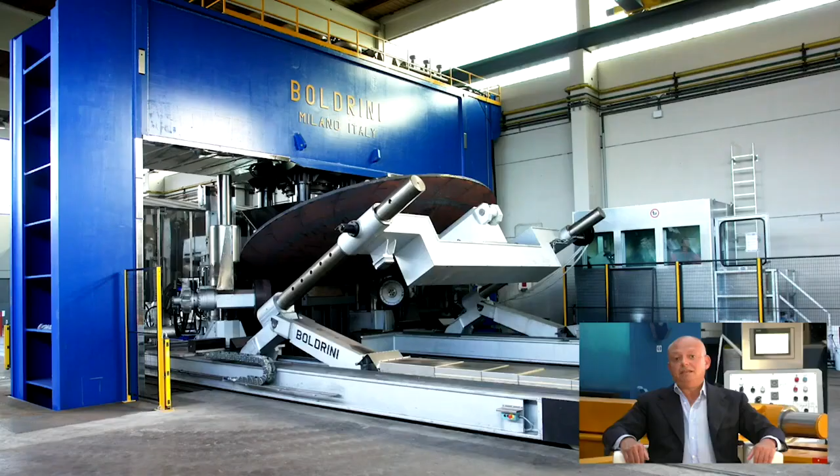I have been working for a great part of my work life in industrial machinery for metal forming. I have followed the commercial and technical development of some of the most important equipment in the market. Just to give you some examples: dishing press, 1,000-ton force, 10-meter span between the columns with automatic manipulator and CN. Dishing press, 1,200 tons with automatic manipulator CN capable of working in hot and cold condition.

Flanging machine capable of flanging up to 80 millimeter thickness material, 516 grade 70, and maximal knuckle radius of 1,000 millimeter. Rotex hot spinning machine. It's a unique piece of equipment capable of doing hemispheres and heads starting from a flat blank 7,200 millimeters and plate thickness 220. And also plate roll with variable distance, so the pitch of the bottom roll, 3-roll type, 6,750 tons.

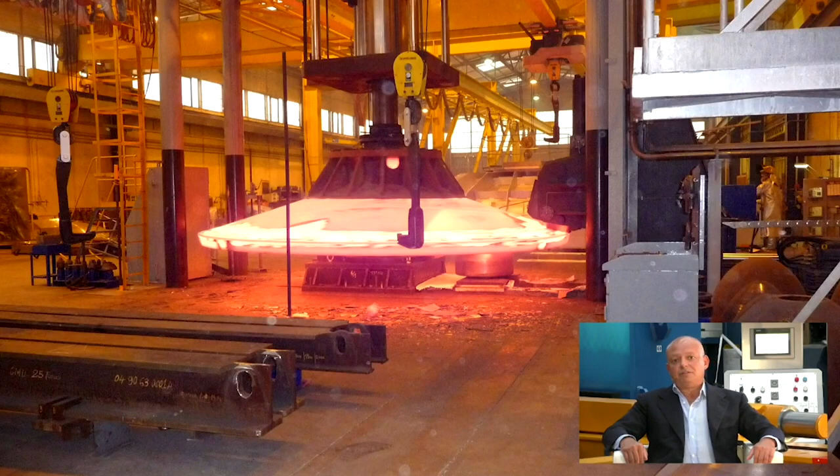I think that there is always room for innovation and sustainability. Faccin Group embodies this spirit by offering to the market 3 leading brands like Faccin, Boldrini, and Roundo. Our challenge today is to achieve the highest level of efficiency in any kind of machinery that we produce. Well, I can definitely say that we are in very good hands. But before we move to the main subject of this webinar, Rino, I wanted to ask you something. We have seen a huge interest in this webinar and many registered people from all over the world. Why do you think this is?

Well, Javier, let me start by saying that most manufacturers of pressure vessels, truck tanks, silos, and other kinds of tanks and pressure vessels purchase the dish heads and then they weld the component to their roll part. Let me tell you that the demand is huge and dish head manufacturers are getting overwhelmed. With the pandemic, the deliveries, particularly internationally, have been disrupted. And there is now a new line of thinking about manufacturing locally, and I do believe this is driving interest to this webinar.

Perfect. So we will focus on this concept and more during our webinar and explain in detail what we are doing to achieve efficiency in our machines. In the meantime, let me show our viewers our group's manufacturing capabilities. Certainly, Javier. Let's start from the real facts of our capabilities and our facilities.

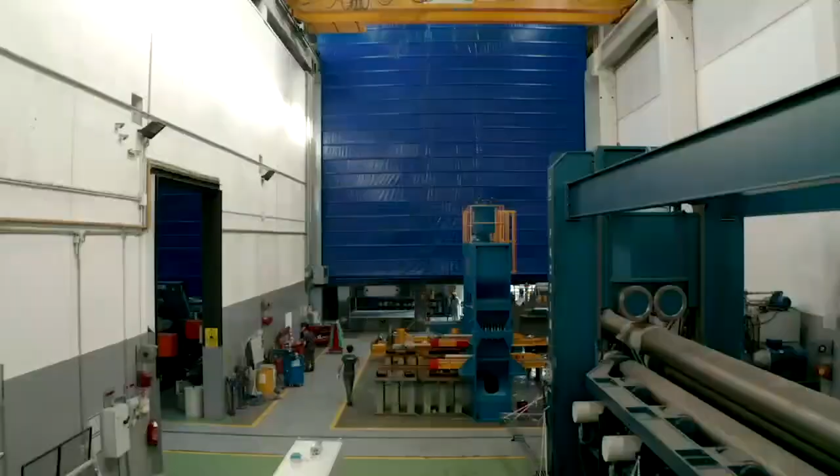Wow. During these days, we have been discussing all over the world the impact of COVID-19 on the world economies and on industrial production after the restrictions applied to contain the pandemic. So, Rino, what do you think about the vertical production structure? Javier, this is a real big thing.

During the last decades, many industries have organized their supplies by outsourcing from the market. It has been understood very clearly now, when the market collapsed and many companies could not follow their production schedules and supply chains were not performing, that outsourcing can be risky in such a market condition. As you have seen in the company video, at Faccin we have a vertical integration. We start with plate profiling, fabricating, machining, and we can do internally turning, milling, boring, and polishing.

We found out that having this in-house has been the greatest support for our resilience. Furthermore, we have full control of quality inspection, pre-shipment commissioning, testing, and crating for shipment. It was a wise decision to keep vital and critical production stages inside Faccin. This allowed us to keep working and also to acquire new orders, as we can have better control on the delivery and generally on scheduling.

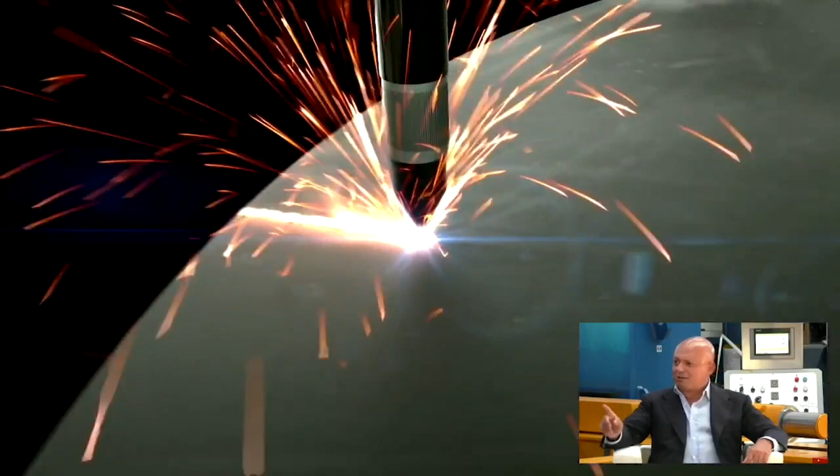I hope that you studied last night about the dishing and flanging process. Javier, you can bet I can even tell you the difference between a press and a flanging machine. Well, I think that one fits rolls and the other fits dies, but I'm not sure which one.

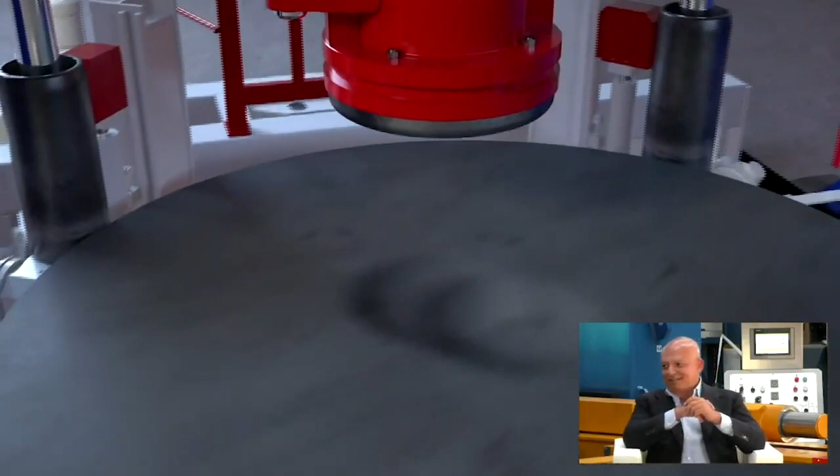Of course. Well, Javier, apart from joking, I think that I'm a DNA engineer for heads production, and my experience is fully available to the Faccin organization and its customers. Rino, we are now ready for the first main question. If I were a client, what should I know before investing in a new dish head line? At first, Javier, there is no common rule, as the best for one client is not the best for all clients.

Rino, I think that we both agree on your assessment. Tell us how to get the best solution for a specific customer. As a first step, it is very important to make the preliminary approach to the customer's needs. The pre-feasibility is the most important stage for the proper definition of the correct machine. Let's ask Andrea Comparin, Senior Sales Manager of Faccin Commercial Department. Sure. Hi, Andrea. Can you introduce yourself and then explain to us what is generally the client's preliminary approach?

Hi, this is Andrea Comparin. I've been working at Faccin since 2011, and I had the opportunity of traveling throughout the world for the company, but I follow mostly Northern Europe and some Mediterranean countries. I also joined the sales team for relevant projects all over the world, from Australia to South Africa, Middle East and Far East. Generally, we deal differently with inquiries coming from new clients planning to start a new production line, and from clients already experienced with presses and flanging machines.

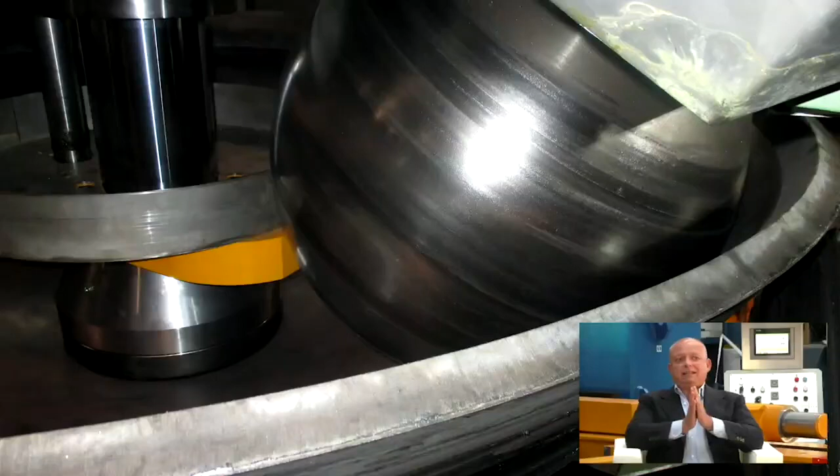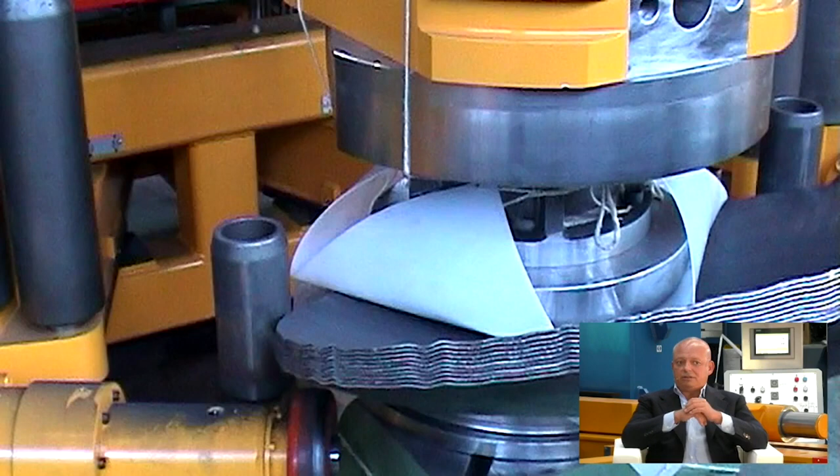Back to you, Rino. So how do I get a fast payback on my dish head line investment? Rino, at the end, I think this is, I guess, the most relevant key driver. Javier, you're asking something very important. Many times we see proposals from our clients. At first sight, they just look like a list of brands and components used to manufacture the machine. We are a machine manufacturer, and we care, of course, about components, but our target is not reselling pumps, bearings, valves, or electric motors.

What we have to sell is the performance, and we have to guarantee the performance of our machinery. Our machine has to be a profit-making unit for our clients. And again, a profit-making unit. Rino, let's make it simple then for our viewers. How do we get to a sustainable investment for our customer? We start from the performances of the machine and the production output.

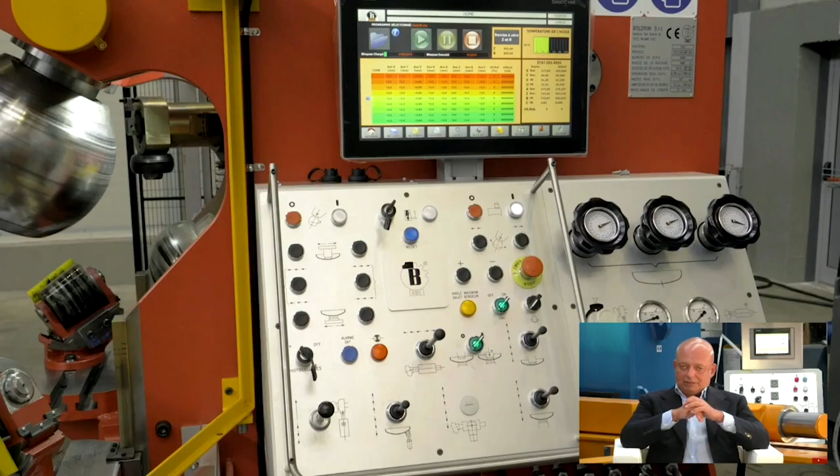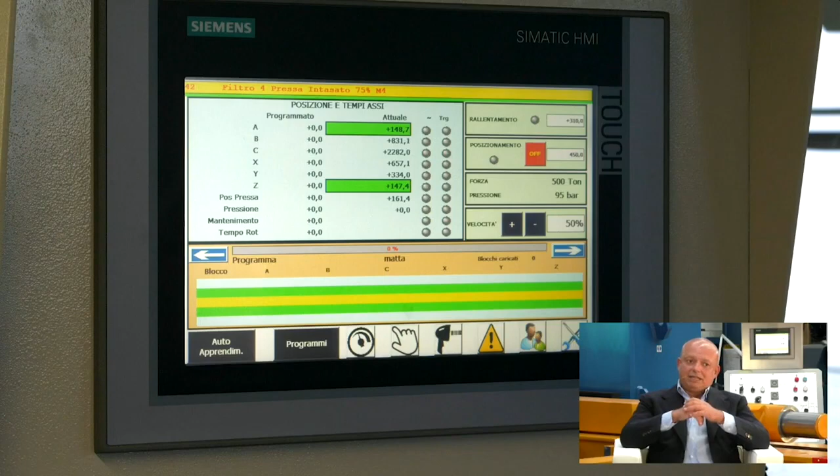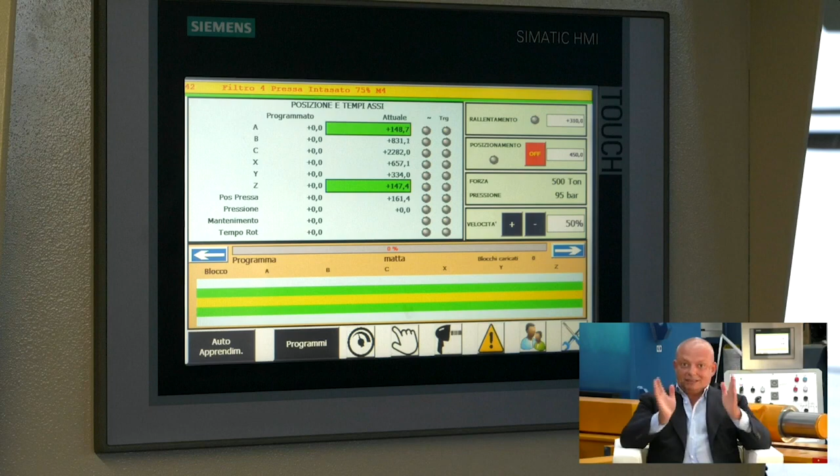We are investing in new software to increase the data output of the machine in a way that our clients will have the machine linked to their network, and they will have the possibility of checking from the back office how many hours the machine was active, how many hours the machine was running in production, the total daily production. In some cases, it will be possible to upload production cycles directly from the office to the machine, and also our target is to check the final production cost of dishing and flanging, including the energy cost applied for each stage.

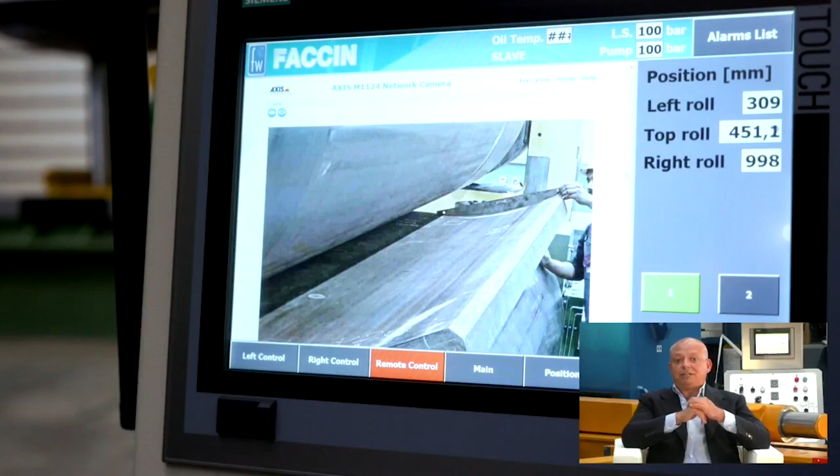And also, we have to be predictive for the maintenance of the machine. It will be a modern and updated way to have a better footprint in the production plant of our clients, and to reduce carbon emissions and protect the environment. It sounds very interesting, Rino. Could you please explain what else we could offer to our customers?

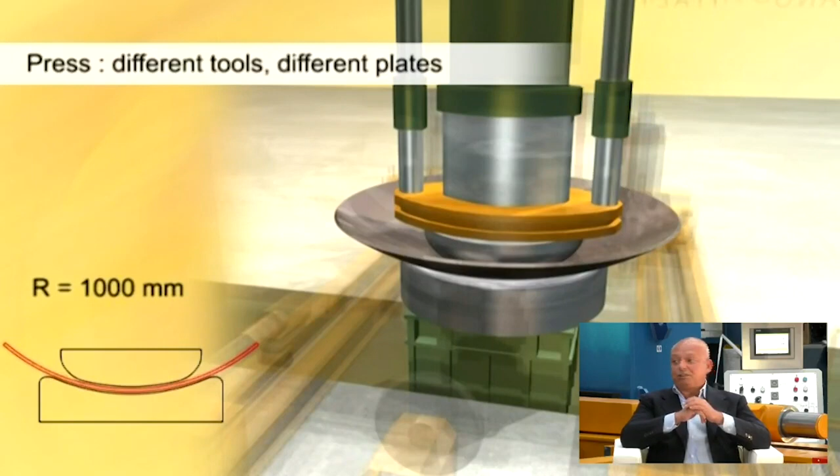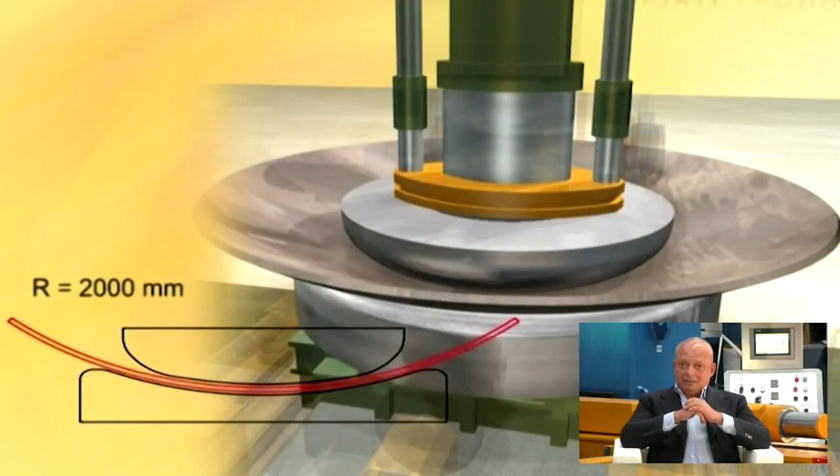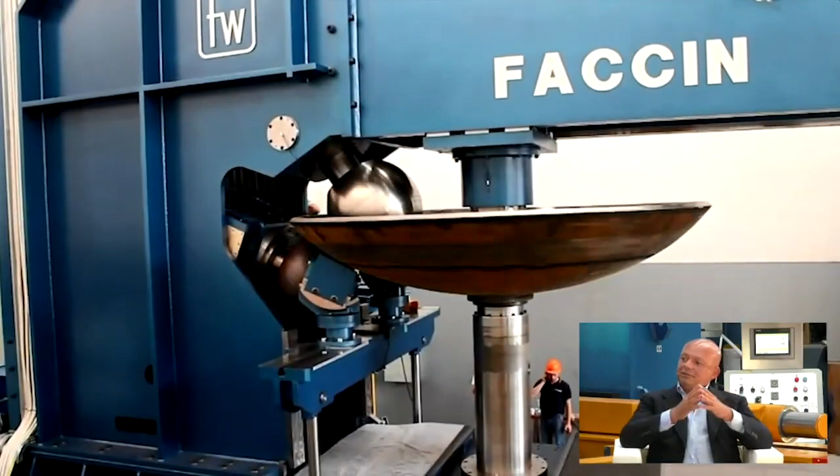Javier, we are very flexible to adapt to our clients' needs, and for many decades, we have manufactured many different types of press dies for specific needs. The right press tooling might reduce the production time up to 30-40% in the total dishing time, and also it can reduce the thinning. A typical example is when we press aluminum plate. Some diameters and radii require changing 3 to 4 dies, and the time to change the dies is much less than the total time if we were not doing this process. So at the end, we save time.

Using the right tools, we also significantly reduce the thinning. And you said, why that? Because we don't overwork the material. And saving the material is the first target for a client. And also, we may save intermediate heating processes, because if we can control the thinning, we don't need to add extra expensive heat treatment. I think that Marco Massensini could tell us more about his experience.

So Marco, can you tell us about yourself and your experience in the support process to your clients? Hi Javier, I'm very dedicated to the support of our clients, and I recently had a few cases that we studied and carried out successfully. I joined the Faccin family 4 years ago, and I come with a process engineering degree. I've had a great chance to grow my capabilities following very interesting tasks.

One client with a market activity of 25 years producing equipment for the pharmaceutical and food and beverage industries had developed its own equipment. I analyzed their production steps with them, and finally we came out with new machinery and new processes. The final result was a significant production cost reduction, and our client was very satisfied since they obtained a higher added value product to be offered in the market at a better price.

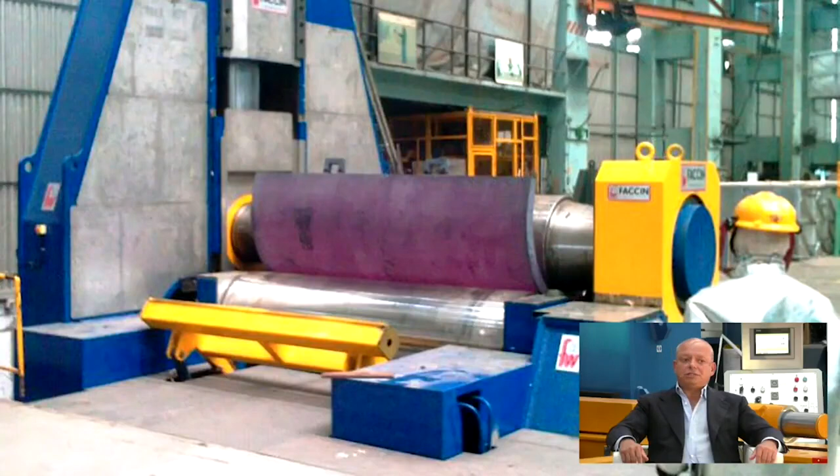We have materials that can be formed in both cold and hot condition, and we choose hot forming many times to increase the forming capability for higher thicknesses. In pressing, we may also choose the hot process to reduce thinning and to cut the manufacturing process time.

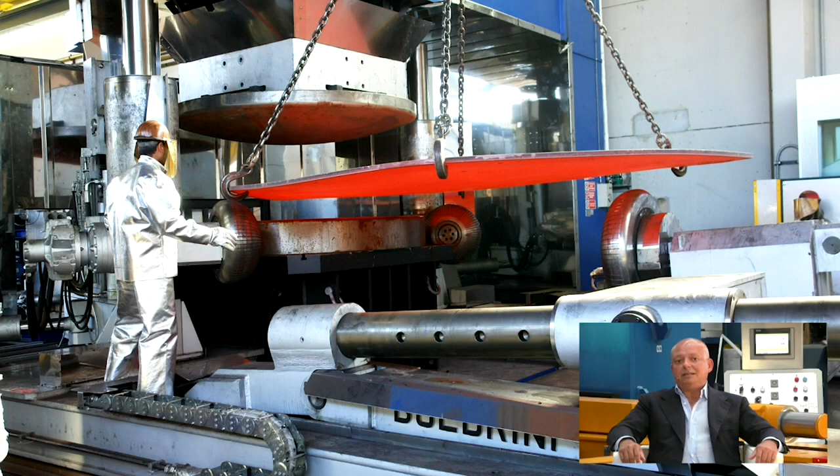We have a very successful experience with the dishing press and manipulator to press plates up to 160 millimeters in hot condition. In other cases, the heat delivered to the plate is necessary to avoid damages on the material, for example aluminum, where we have to heat the plate up to 250, 270 degrees to avoid any cracks. In other cases, titanium - if you don't heat titanium up to 500 C, there are no chances to form it without damaging the material dramatically.

Hi, this is Diego Morbini. I've been working at Faccin since 2005, and I visited many countries during my time at the company. But I now follow mostly the Chinese market, Far East, and Oceanian countries. I also support the sales team in relevant projects, from the technical evaluation of special equipment to tailor-made solutions for different fields of application.

It's very important to start with a proper definition of our clients' needs, as this is the key to the right proposal. I've got experience in selling forming lines to customers that manufacture pressure vessels and also cryogenic tanks. In Vietnam, for example, we were successful twice with a client that produces heads for the global market.

So Diego, in your opinion, what is the key factor of your marketing strategy? I think that our clients do consider the support we offer, from the proposal to the after sales. We build up confidence based on the long experience of the group in design and manufacture of head forming lines.

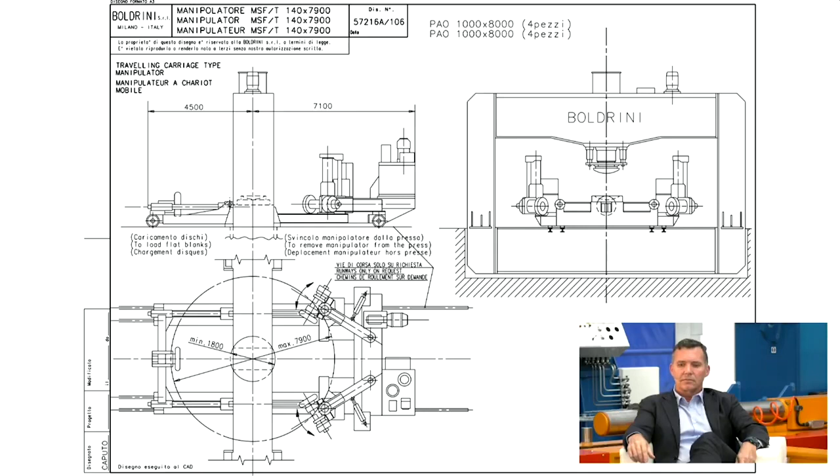Rino, I would like to show some pictures. Would you like to comment? Surely, please. Well, you can see in this picture a layout drawing of a typical dishing press with manipulator. And this is specifically a machine with a pretty big daylight of 8 meters and 1,000-ton force.

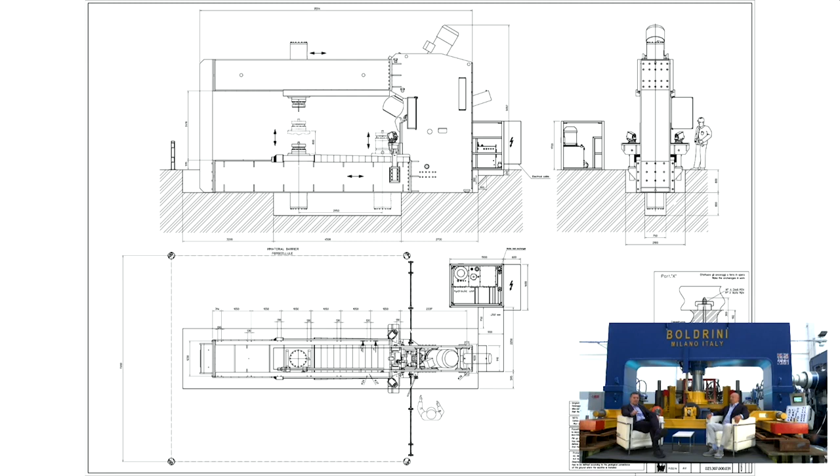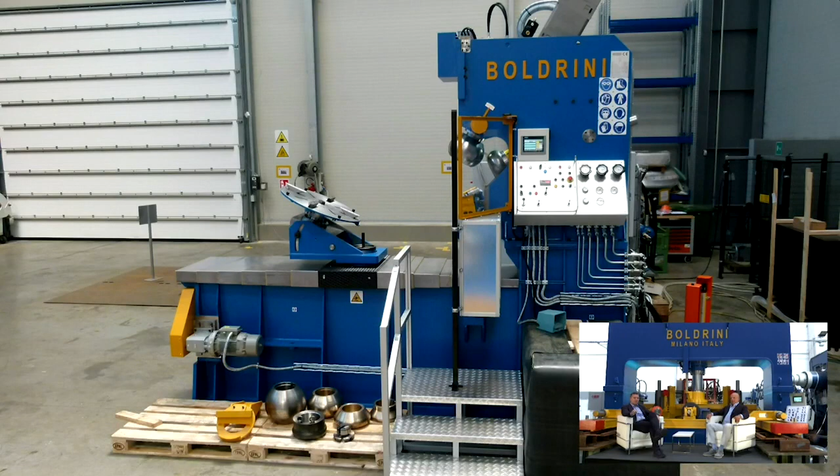And this small flanging machine, it's small but powerful because it has interesting features. It can work without the upper beam. It is very fast, very versatile, especially to make a conical shape, tilted and with vertical axis of the cone.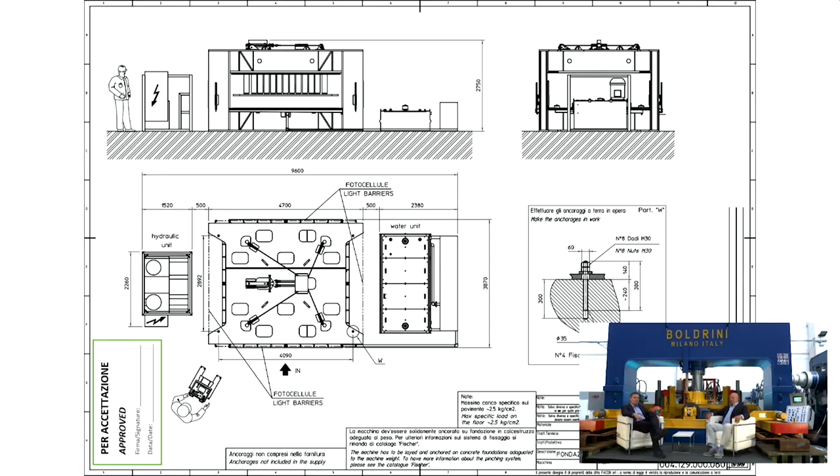You can see in this picture we have the layout of a very special press. It's a hydroforming press designed to make oval, elliptical, and multi-center heads. In the next slide you can see the specific part produced. Being formed with hydroforming, the stresses are very even, and there is no part of the material that is overworked, and there are no damages on the surface. It's also a very fast process.

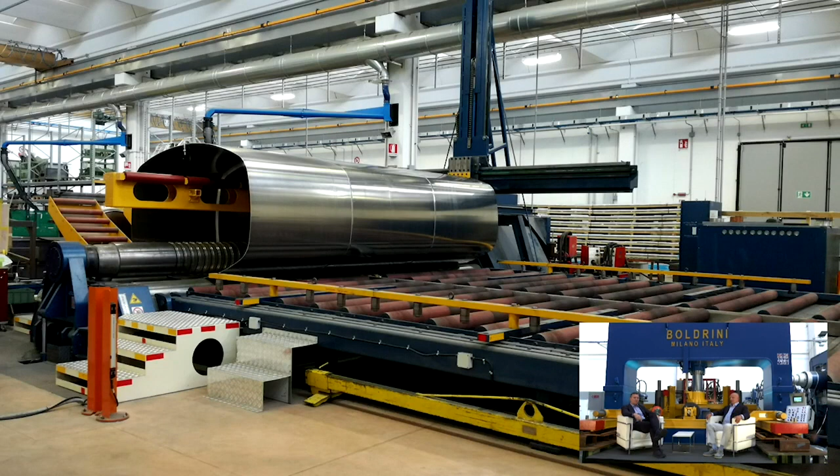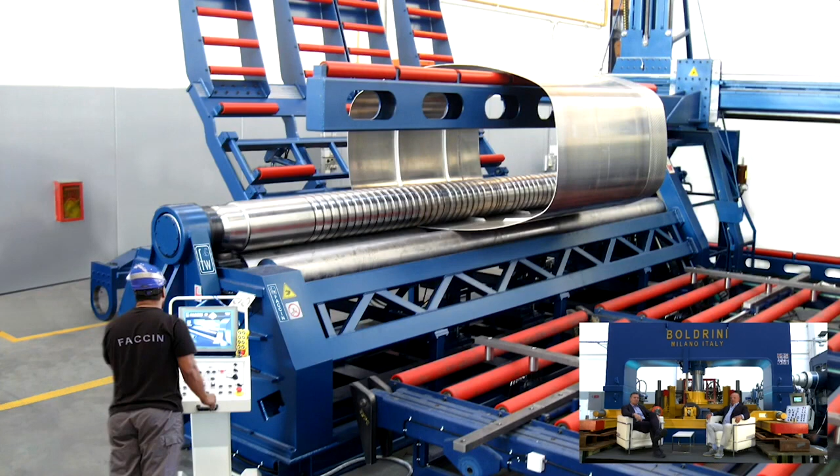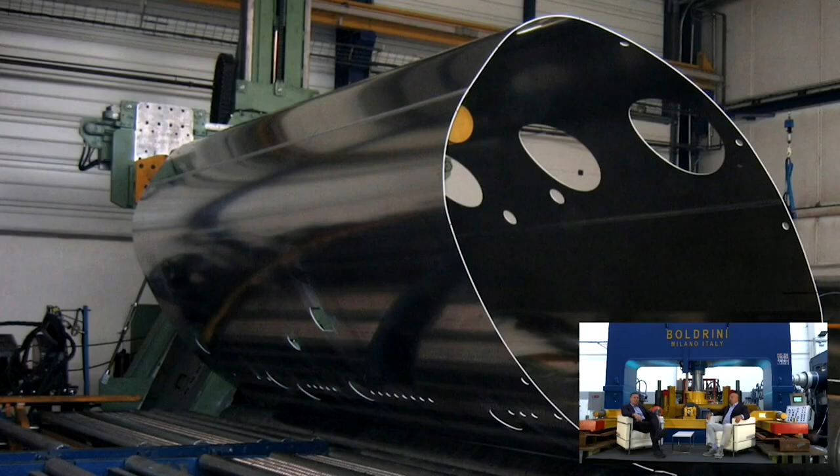As we said, we also have the capability of doing CNC plate roll, 4-roll type, especially designed to make the shell part of the truck tank. In this case, the top roll is designed with special grooves that are necessary when we roll shells that are already welded with the inside stiffeners. Or we can even make shells in elliptical shape when the machine rolls plates that are already pre-machined with holes and pierced.

We have so many different configurations and models, as we might see in the following pictures. What is the technical reason of such design variety? Javier, for any different design, there is a reason: saving production time, first of all, and optimizing the process line. Let me explain, going to the pictures.

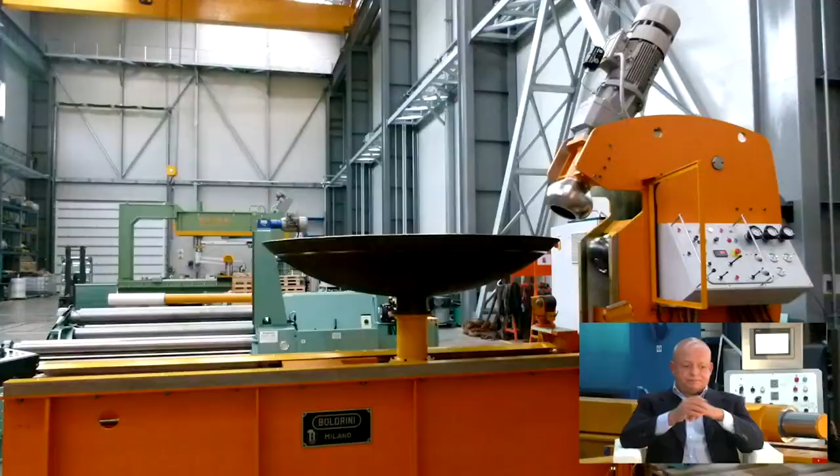This machine is the smallest we have in the range, a 6 millimeter up to 4 meter diameter flanging machine, electric drive, very effective machine, and special for simple tank manufacturers.

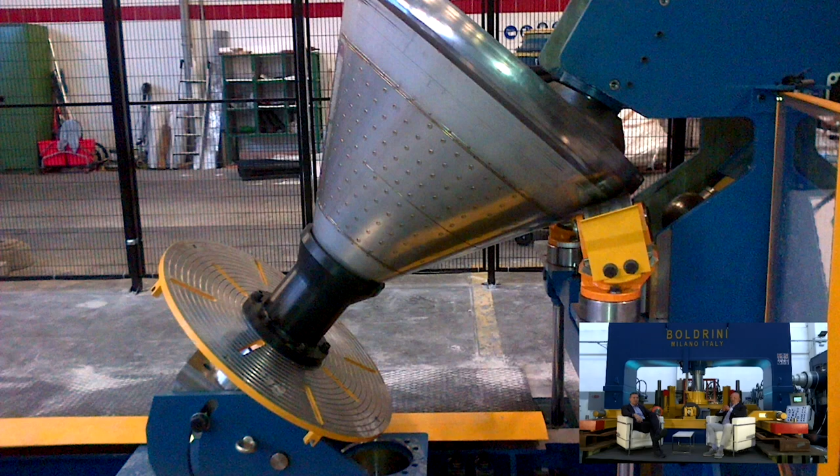We have a similar machine with a device studied to flange a conical shape, tilted. This is for food industry, for example.

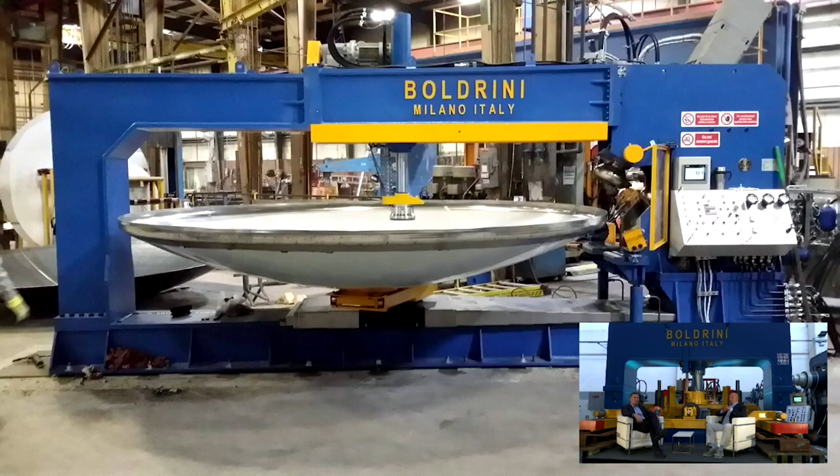This other machine is a combination of a machine without center hole and with center hole. One part of the machine can be disassembled in order to reach higher diameters, or it can work without center hole, and it is very effective when we work on stainless steel blanks.

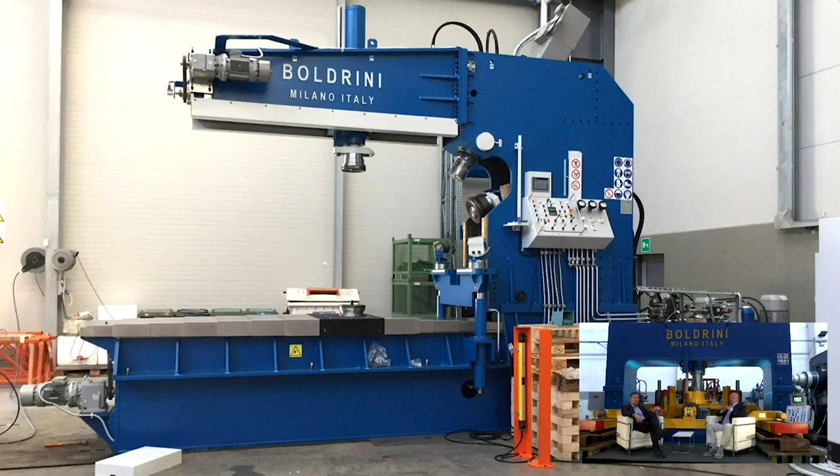This is a typical configuration of a machine with center hole. This is with electric drive and all the most modern control for the hydraulics.

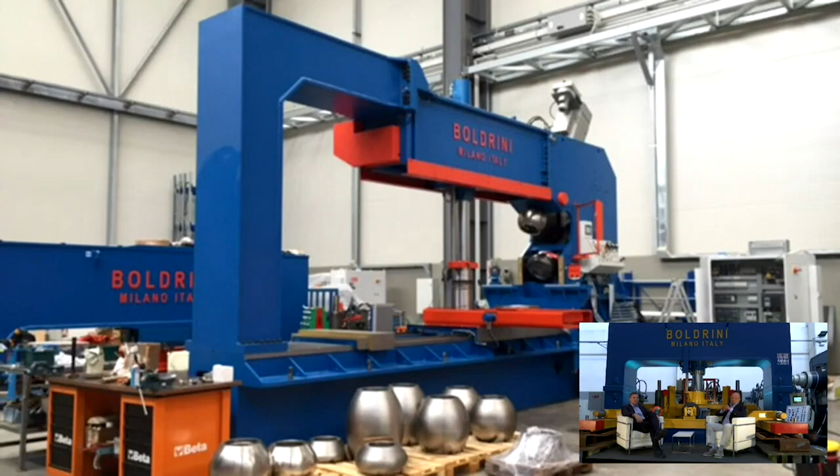This is a similar machine for higher capacity. It can also be supplied in the configuration with and without center hole by removing one portion of the upper beam.

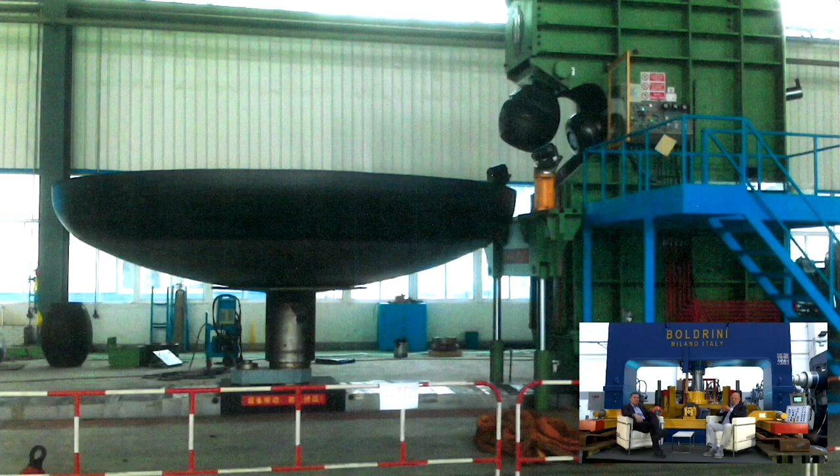And this is a unique piece of equipment. It's a flanging machine in a configuration that can flange components up to 12-meter diameter. 12-meter diameter is 40 foot. It's a very big diameter, with a plate thickness of 35 millimeters. It has a very special clamping system that does not require any man operation in the lower carriage.

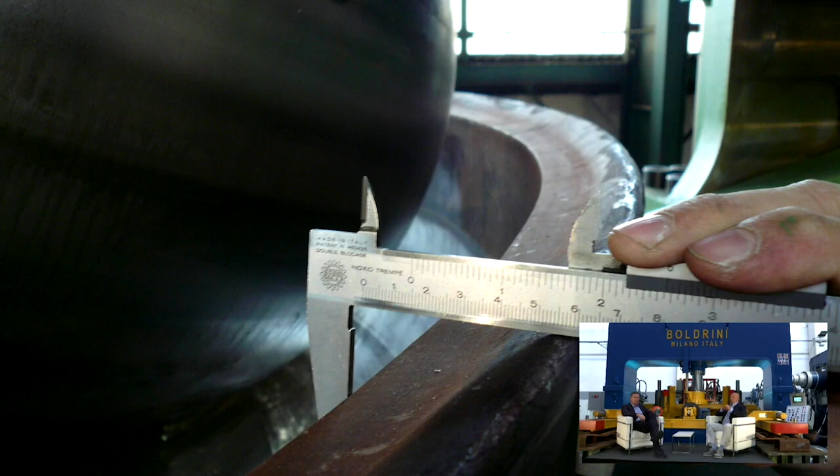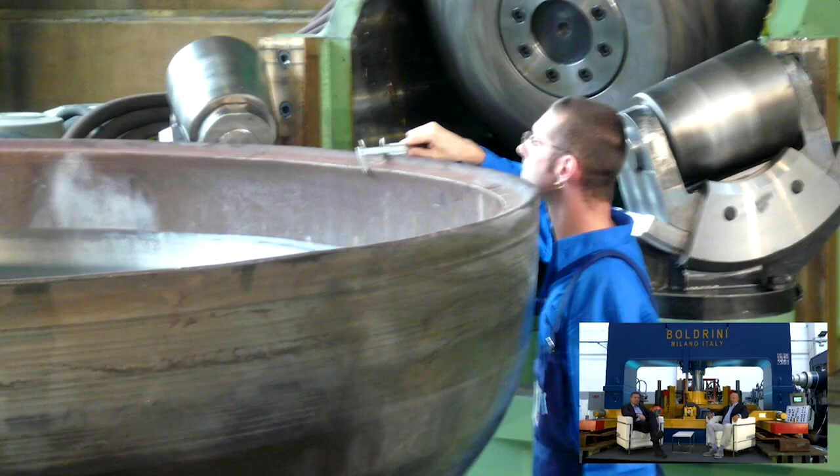We can also have the wider variety of capability in working on plate thicknesses. In this specific case, we have a head done with a thickness of 65 millimeters, and this is done with a special machine that can make components up to 80 millimeters in cold forming. You can see very well in this picture how massive the wall of the head is compared to the hand of the operator.

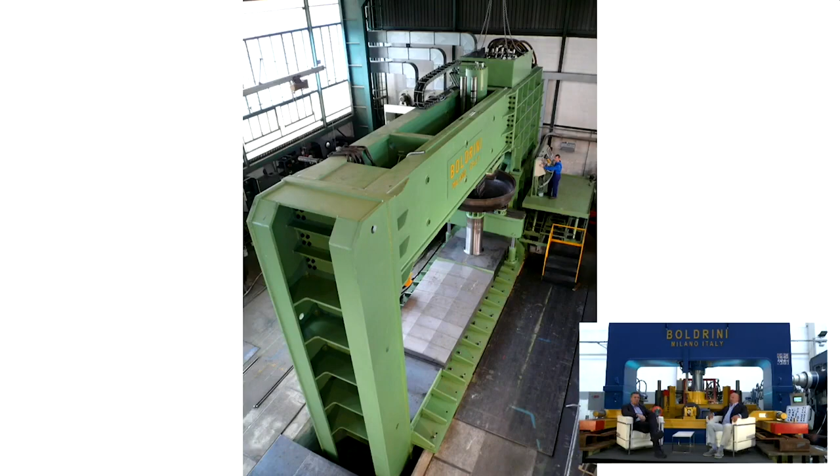And here you can see how massive the machine is that today is still the highest capacity machine in the market, at 340 metric tons, with an incredible capability of making heads without center hole.

So what about the technical reason of different press design and application for the automatic manipulators? Javier, we can press parts from 250 millimeter diameter up to 10 meter diameter, and in some cases we can also look at the specific client demand. We can also recalibrate finished heads, or we can even make very long segments for larger spherical filled tanks. Any custom design can be done by our technical department, and we have presses that can cover the whole requirement of the industry of tanks and pressure vessels.

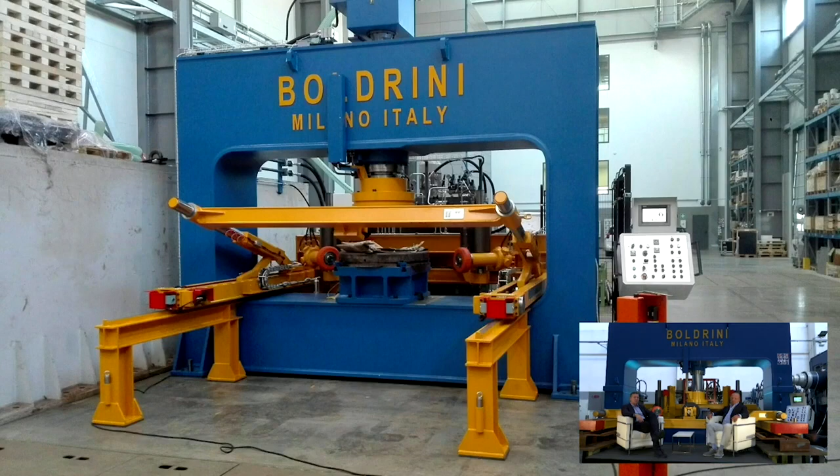With this tiny press, 150 ton, it's a very fast equipment, very suitable for small components. This is a 200-ton press with CNC control, with a manipulator designed also to make parts of a small diameter.

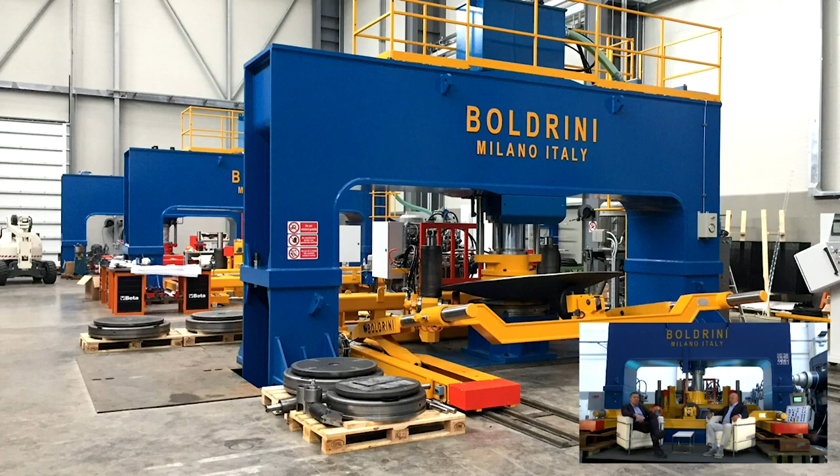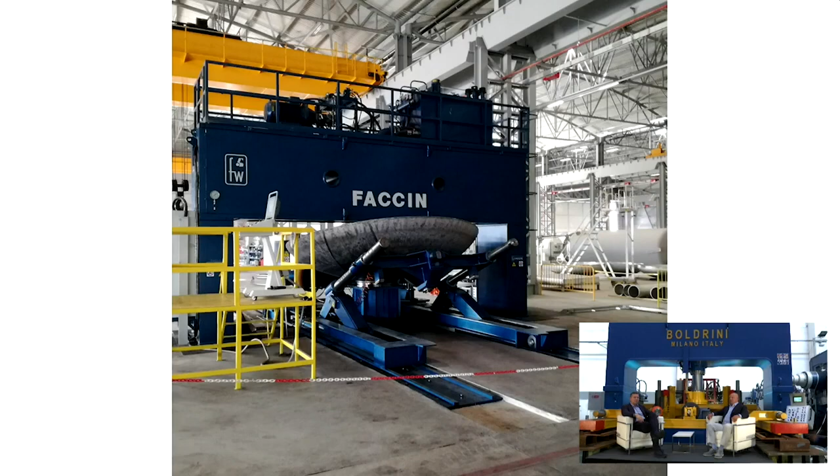This is a 300-ton press, typical for a tank producer and also for trailer tank producer. This is a 600-ton press for heavy-walled material and with automatic manipulator.

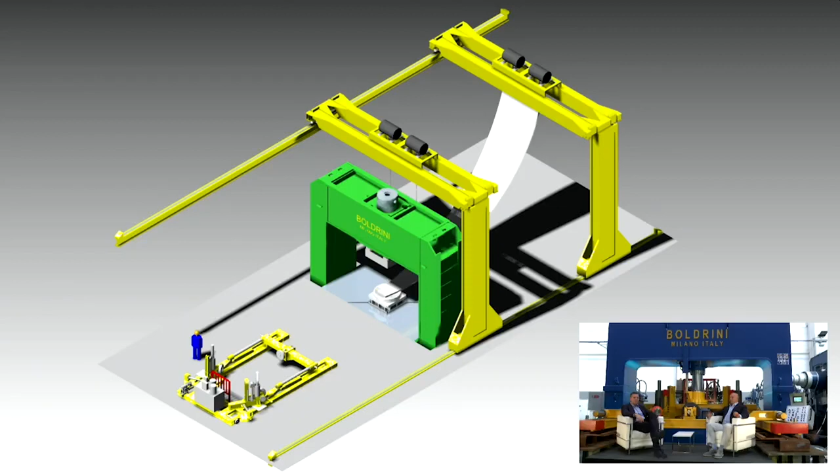In this layout, you can see the combination of the crane and the press to press long segments to make spherical fill tanks, and a manipulator to make the crown. And this is the typical design of the automatic manipulator that fits in our presses and in many other presses.

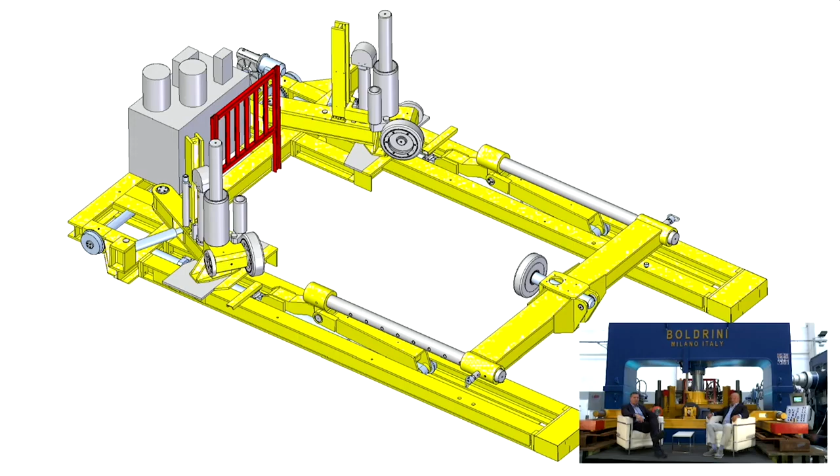When we are talking about very big diameter hemispherical heads, or very big diameter elliptical heads, we have the possibility of doing that with the technology of crown and petals welded together. In this case, we can design the complete process so that with the press we can do the segments and we can do the crown.

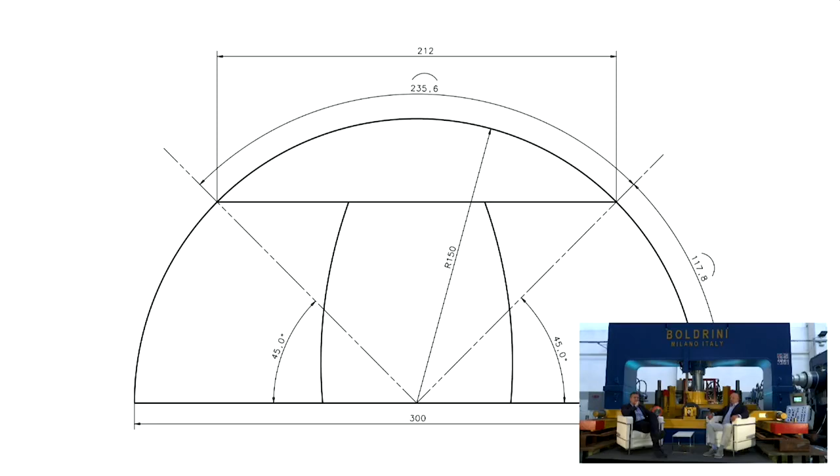We also have presses, a C-frame, that are very suitable for recalibrating heads and very suitable also for recalibrating hemispherical components.

So, Rino, what is the most difficult task in manufacturing machinery capable of warm and hot working? Javier, we have to consider three different aspects. First, the design of the machine - we need to protect the part of the machine from excessive irradiation. Second, and very important, we have to protect the worker and the complete process line around the machine. Third, we need the controls of the machine to be very accurate to avoid thinning and damages to the material.

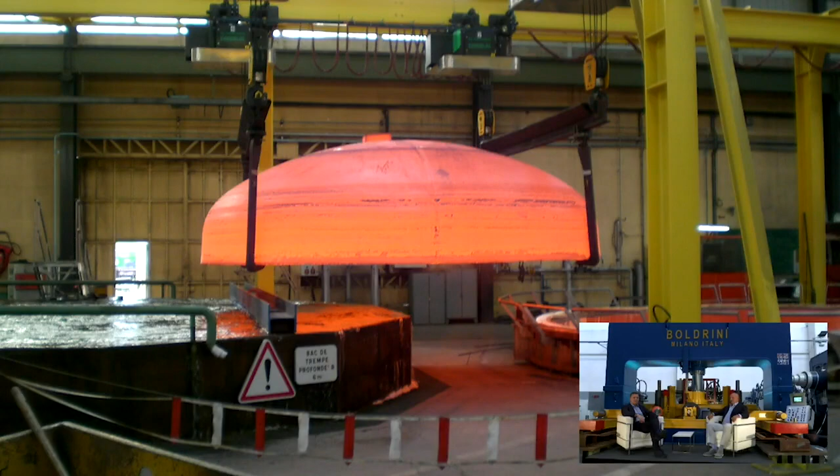We have done the widest span of application for warm and hot forming in the head and tank industry. You can see in this picture a very thick wall component for the nuclear industry.

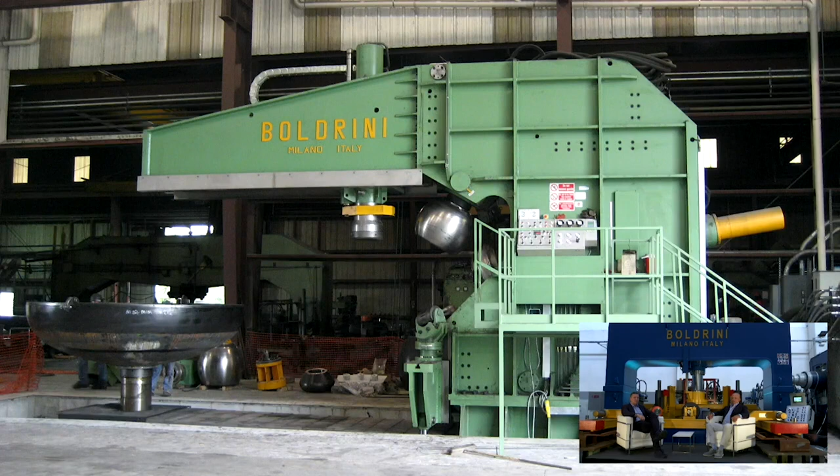This is a special configuration of a 32 millimeter flanging machine with hot protection, and also the possibility of tilting the upper beam to the side in order to make very high and complex components like cones or asymmetrical cones. This is a larger size, also with hot protection, to make heads up to 50 millimeter thickness.

So, Rino, I understand that hot working is very important in many applications. Could you explain more about this subject? Certainly, Javier. Let me comment on the following picture explaining the advantages and peculiarity of the hot forming process.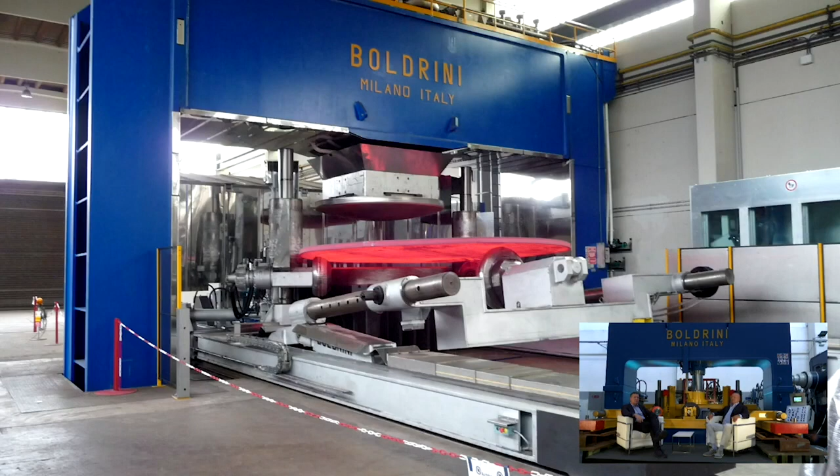This is a special configuration of dishing press designed to work hot blanks exactly like working with cold blanks. So we designed it with all the protection, with better kind of control, and this press can use larger dies in order to reduce the process time.

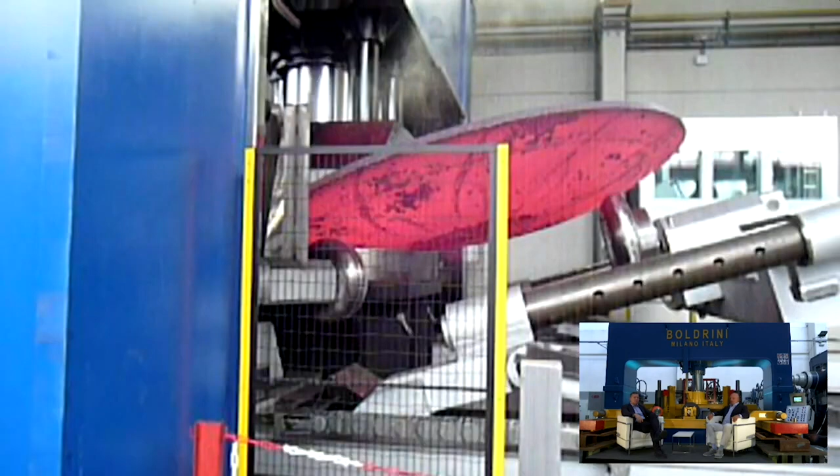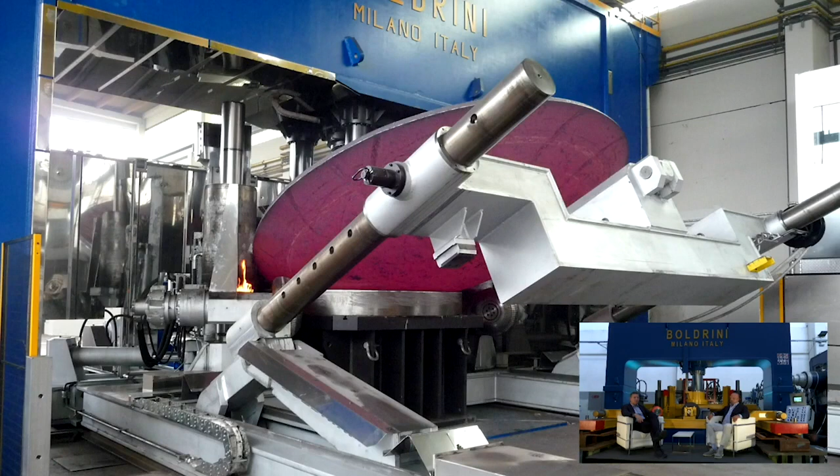You can see one phase of the process, and you can see that the piece is still very hot, and we already reach a good shape. You can see now that the piece is cooling down, and the shape is practically finished. And here we are at the last steps of the process.

So the return of investment and the performance of head forming machines. Rino, how would you approach this subject? Javier, the range of the Boldrini Faccin machine is actually the widest in the market. We are able to guarantee any solution for any material, any kind of carbon alloyed steel, any kind of stainless steel, and the family of duplex. But also we can work on titanium, copper, aluminum, clad plate.

So the life cycle of an investment is also linked to the productivity and to the scheduled service of the machinery. Massimo, can you tell us about the new improvements in your department? Hi Javier, service is a very sensitive area as we are one of the ones responsible for machinery - for testing before shipment, up to units already installed for decades.

We have a file for thousands of machines, and we don't stop - we constantly do improvements. A WhatsApp quick contact center for instant communication in addition to technical improvements for remote communication with existing and new machines. This is a cloud-based service connected through a smart box installed in the machine cabinet. This smart box is also designed to upgrade all equipment and to monitor some functions.

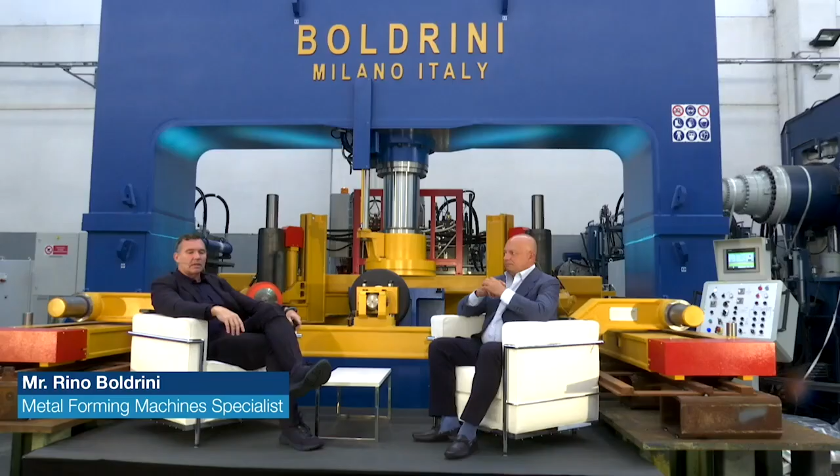Fantastic. Fantastic, Rino. So our third question. This is from John from Ireland. What kind of control do your machines apply for thinning? This is a very important question, as sometimes in the market this is not considered in the proper way. There are ways to consider thinning reduction, like gap control, like pressure control. What we have to apply is to make a combination.

So we have in our flanging machines the possibility of using the gap control, but also as a backup, the pressure control. And this will reduce the thinning where you have wrinkle during rolling. For presses, and especially for hot working, we have a position control and pressure control in order to avoid any overworking on the material while pressing through the dies.

So now we go to our final question. So this is from Antonio from Spain. Gracias, Antonio. How fast is the die change on your presses? Well, the die change is always a different kind of problem. Is it the first setup in the morning, or is it a die change during the process? We had different solutions in the past.